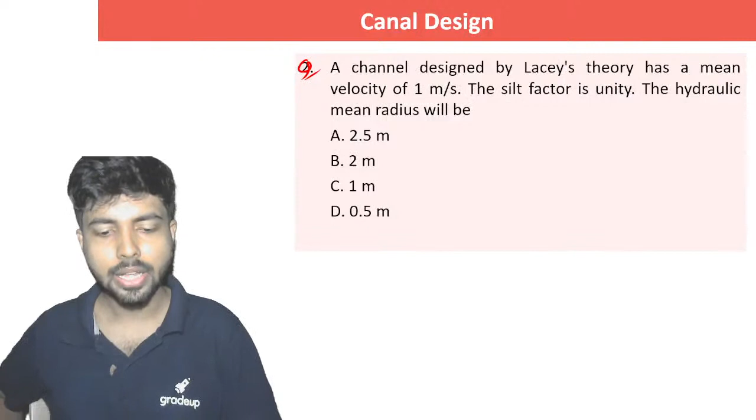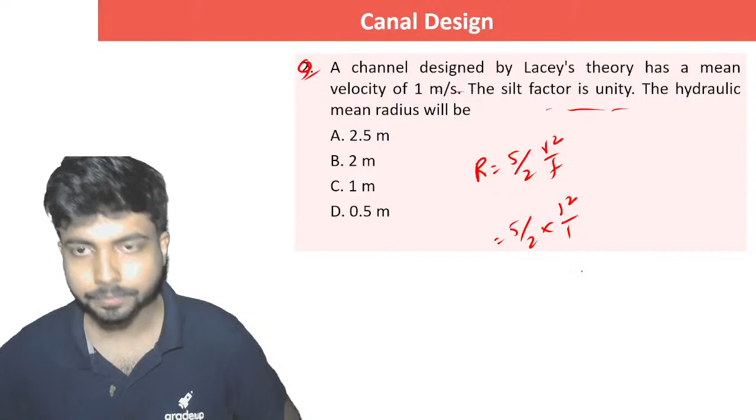So let's see who's going to give the correct answer. Very easy question. We know R is equal to 5 by 2, V square by F, right? We have talked about this particular thing before, this was a check for it. So it's 5 by 2. Starting off with very easy questions. Velocity is 1 meter per second and silt factor is also unity, so it's 2.5 meters, right? So you can understand it.

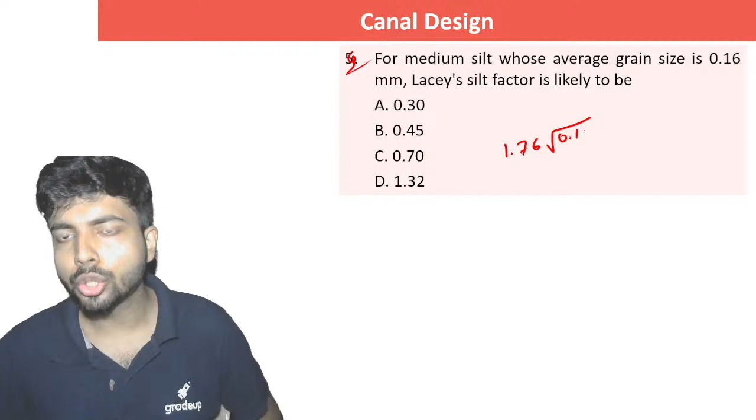Next question is up on your screen. For medium silt whose average grain size is 0.16 mm, Lacey silt factor... Some 1 mark questions first, after that we'll go towards the 2 mark questions, MSQ and NAT. Okay, very easy, ultra easy question. It's 1.76 root over DMM. So it is simply 1.76 into root over 0.16.

So tell me, what is the possible answer? Only one possible answer is there, that is 0.7, right? Next question. The Lacey silt factor for a particular alluvium is 2.0. The alluvium would comprise of what?

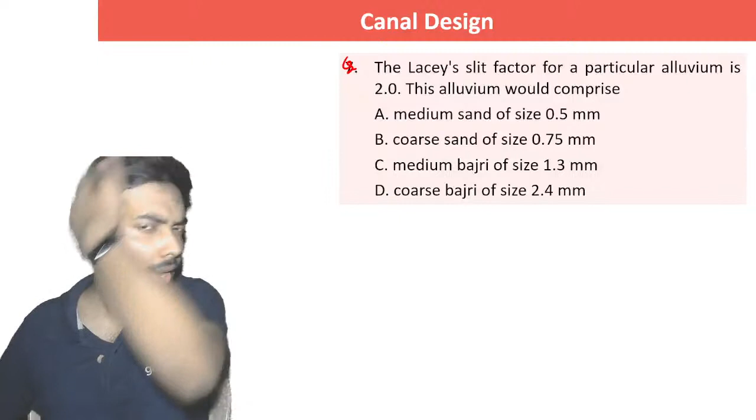The Lacey silt factor for a particular alluvium is 2.0. The alluvium would comprise what? Options: medium sand of size 0.5 mm, coarse sand of size 0.75 mm, medium bajri of size 1.3 mm, coarse bajri of size 2.4 mm.

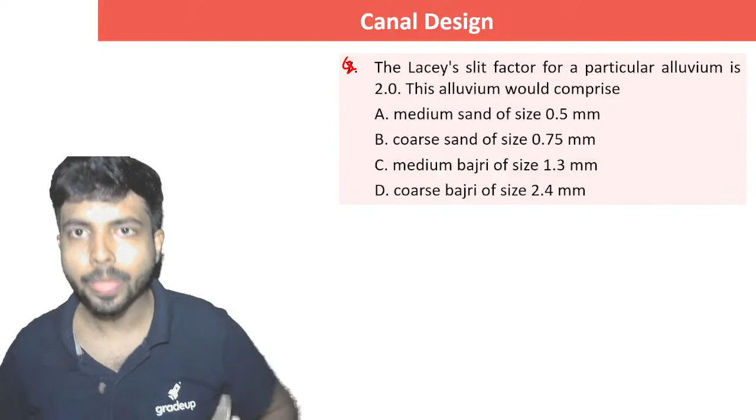Quickly. So again, Lacey silt factor. Many short questions related to this have chances of coming. Are you understanding it? So DMM is equal to 2 by 1.76 square, which comes to 1.3 mm.

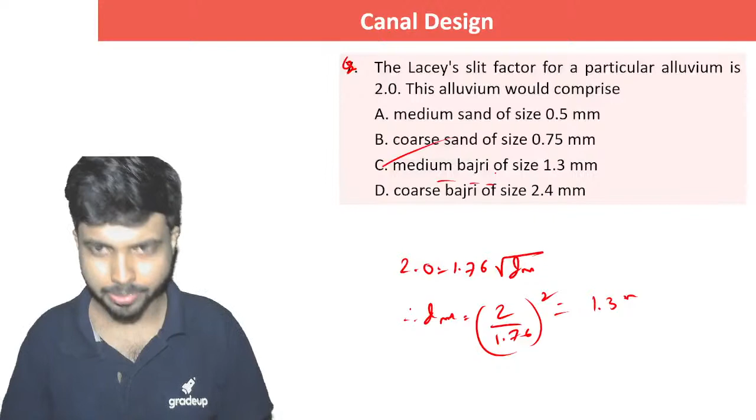Next question is up on your screen. It is actually an MSQ question.

It is an MSQ question, right? I was discussing this particular factor while discussing Lacey's theory, if you please recall. This is an MSQ question, so please be careful. First of all, they are saying silt factor is the average size of silt particles - which one is correctly matched? That is basically what the question is all about. Let's see who is going to give me the correct answer.

Silt factor does not mean average size of the silt particles, right? Silt factor is 1.76 into root over dmm, so it is not average size of the silt particle. What is silt load? Silt load is volume of suspended sediments flowing with water in unit time. Absolutely not. Silt load is the weight of the suspended solid, so this is absolutely wrong.

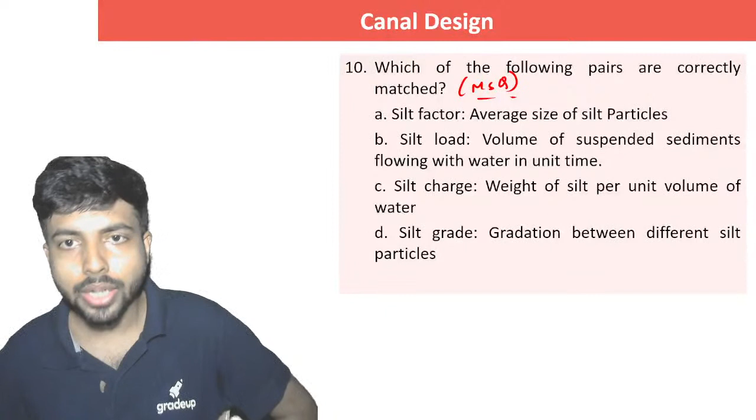Silt load actually means the concentration - how much volume of suspended sediments flowing with water is a concentration type of thing. So the correct option is, we don't call that term silt load. We call it silt charge and silt grade. Silt load is the total amount of silt, that is the silt load. Silt charge is the weight of silt per unit volume of water. And silt grade is the gradation between different silt particles. These two are wrong, so the correct option is C and D.

Understanding? Silt factor is not average size of the silt particle. Silt factor is this one, and silt load is also not volume of suspended sediments at all. It is the weight of suspended sediments with water in unit time. And silt charge is weight per unit volume, and silt grade is gradation.

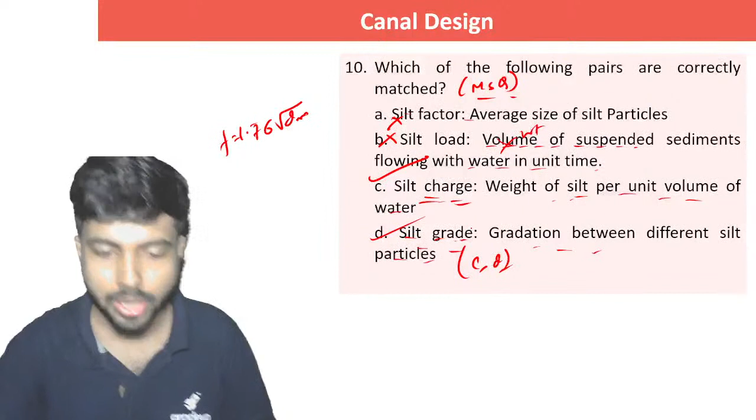Next question. What is the regime scour depth for a channel in soil with silt factor of unity and carrying a given discharge? We didn't discuss that in the morning, so let's discuss it right now. Regime scour depth is a particular formula. Its value is 1.35 q square by f to the power 1 by 3. I think everybody knows this is known as regime scour depth. Just you have to know this particular thing.

The significance is that when we'll be talking about Khosla's theory and other people's work, there you will be able to find the significance of it - the piping, to prevent the piping, and how long it is actually able to scour. So it comes in handy in a lot of things.

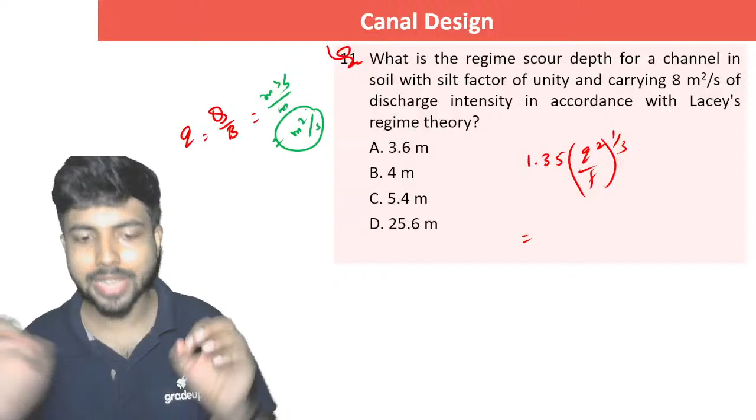1.35 into q square by f to the power 1 by 3. What is the small q? That is the main thing. Small q is actually the discharge per unit length, right? So it's q by b. Q is going to be something like 8 meter cube per second, suppose, and b is in meters. So you understand, it's going to be meter square per second as the unit - and that's why what is given is discharge per unit length only.

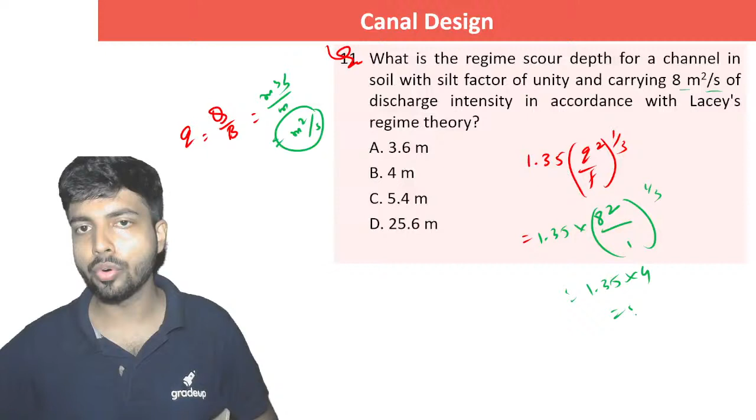Silt factor is unity. So do you understand what is the answer? 1.35 into 64, the cube root means 5.4 meter. So the correct option is C.

Next question is up on your screen. They are saying the channel section can be designed on the basis of Lacey's theory. The steps are mentioned as follows - so which are the first steps? In the morning I told you about the steps, what we calculate first, then what we calculate, etc. So what is going to be the final answer according to you? Please let me know in the live chat section.

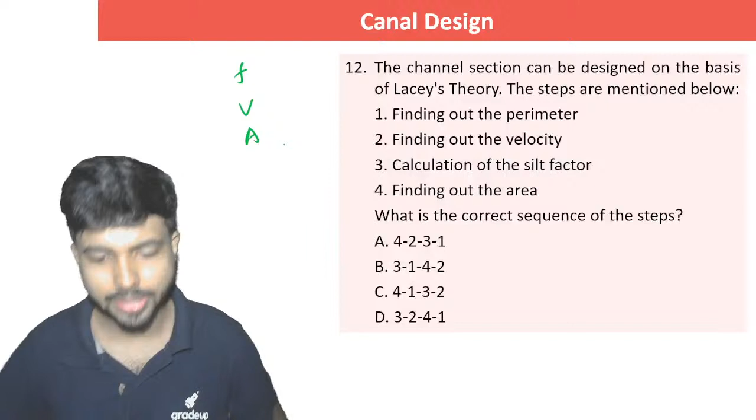It will be easy to solve the problem if you have followed my morning lecture. Absolutely correct, Ankita, on point, excellent. Harish, absolutely correct. So first of all, our job is to find out the f, because after that we calculate v, after that we calculate the area, and so on and so forth. After that we calculate the perimeter and something like that - all these things are there. So firstly the silt factor, because without calculating the silt factor you won't be able to calculate the velocity, which is qf square by 140 to the power 1 by 6. So you need the f value, right?

So for getting that f value you need the silt factor. It's starting from 3. Two options are there, either B or D. After that it's finding out the perimeter or finding out the area. So we know it's going to be finding out the velocity first. So 3, 2, 4, 1, it's option D. I hope everybody has got it right.

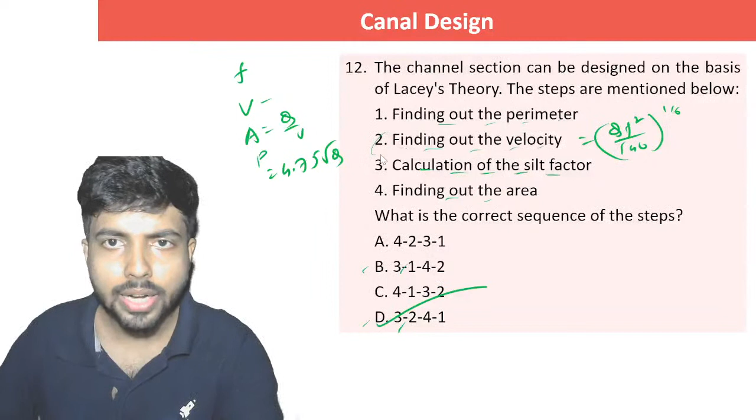So after that we follow A is q by v, and this is 4.75 root over q, and we do that r thing and all, right? So that's all actually. So let's now move over to the next question.

So the next question is up on your screen. Just one second. Next question ka kya ho gaya yaar? Why it's not coming? Okay, just one second please. Oh Bhagwan, kya ho ja raha hai? Yes, the next question is coming actually. The next question has come. Hello.

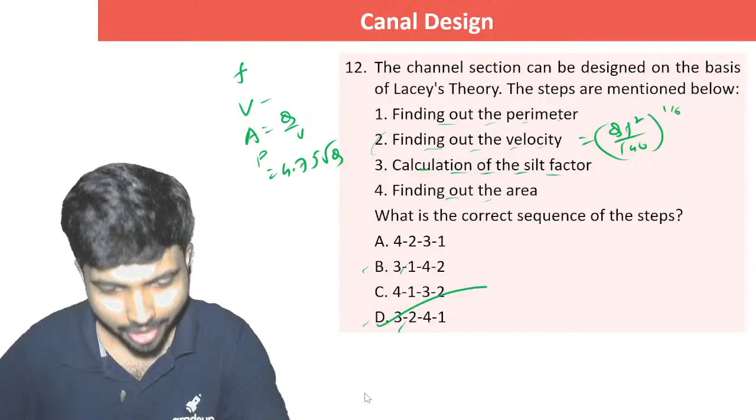Wow, wow, wow. Kya baat hai. Hello, Meghna. Good evening. So that's nice actually, no?

A regime channel will have side slopes of value 0.5 H is to 1 V. Lacey's regime formula is applicable to regime channels with sediment concentration more than...

Hello, Meghna. Hello, Babu. What's that? Okay, right. That's nice. F, V, area, P. That's nice. Hello, Dinesh. Good evening.

So let's see, these are all 1 mark questions so far, whatever we are discussing, except the MSQ ones. This is also an MSQ question, by the way. Except these MSQ questions, all the other problems are 1 mark questions. After that, we will go into the 2 mark questions.

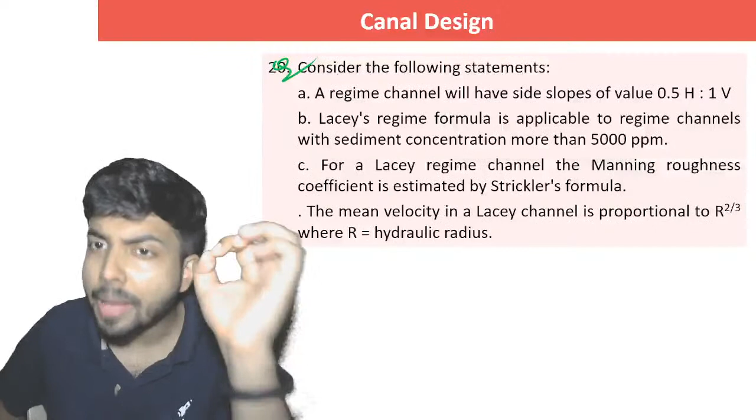A regime channel will have side slopes of value 0.5 H is to 1 V. Absolutely correct. Actually, most of the regime channels have a value of this particular thing, that is 0.5 H is to 1 V.

Lacey's regime formula is applicable to regime channels with sediment concentration less than 5000 ppm. It's not more than 5000 ppm, right? So whatever you can see here, it's less than hone wala hai. This is correct, this is wrong.

For a Lacey regime channel, the Manning's roughness coefficient is estimated by Strickler's formula. Is it correct or wrong? What is Strickler's formula, by the way?

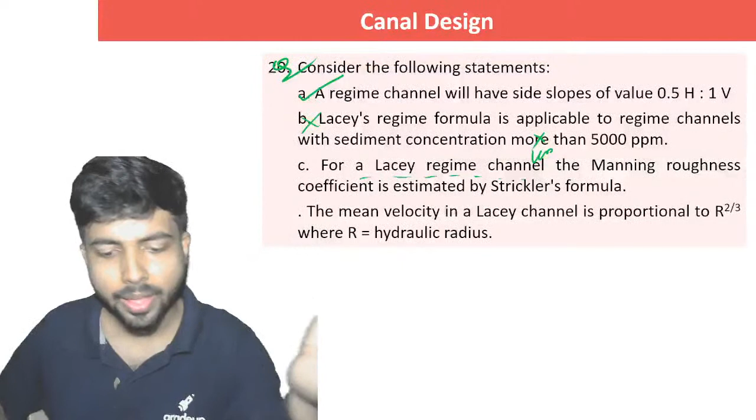Fine, this is wrong, man. This is wrong. See, look how small things you are getting wrong. Lacey's regime channel, where is Manning's coefficient coming from in Lacey's regime channel? In the morning, I told you Lacey's formula is an Atmanirbhar formula, that means it does not depend upon anybody. So it was Kennedy's regime channel. One word was playing with your life, actually, understand?

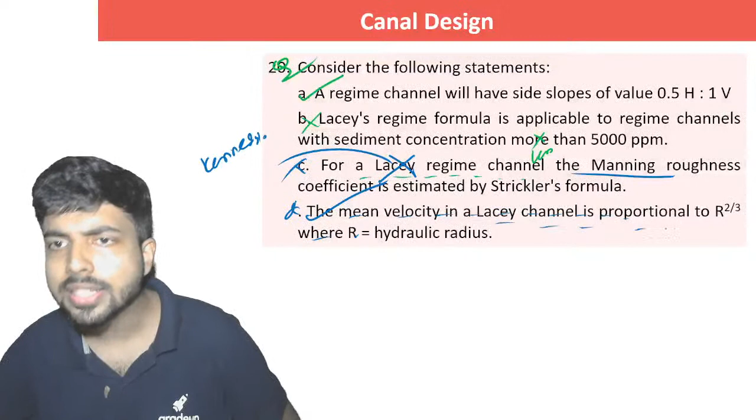So this is D. The mean velocity in a Lacey channel is proportional to r to the power 2 by 3. Now, sir, you will tell me how in Lacey channel it is proportional to r to the power 2 by 3. Sir, there is a particular value that I did not say today. That particular value is equal to V.

10.8. Ek ghante mein to sab kuch nahi bata sakte na. This is also one of the expressions of the mean velocity in a Lacey channel. Apart from that, QF square by 140 to the power 1 by 6, understanding what I'm trying to say? So the mean velocity in a Lacey channel is proportional to r to the power 2 by 3. It's absolutely correct, by the way, right?

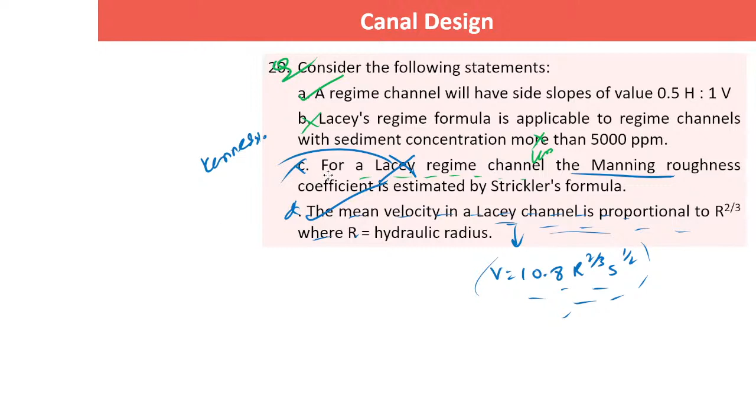Let's see who gives the correct answer to this next question. An unlined canal is to be designed using Kennedy's theory for a discharge of 28 cumecs. The canal side slopes are half and B by D. Yes, by Strickler's formula - thank you for reminding me, Keshav. This is the Strickler's formula: N is equal to 1 by 24 D to the power 1 by 6, right?

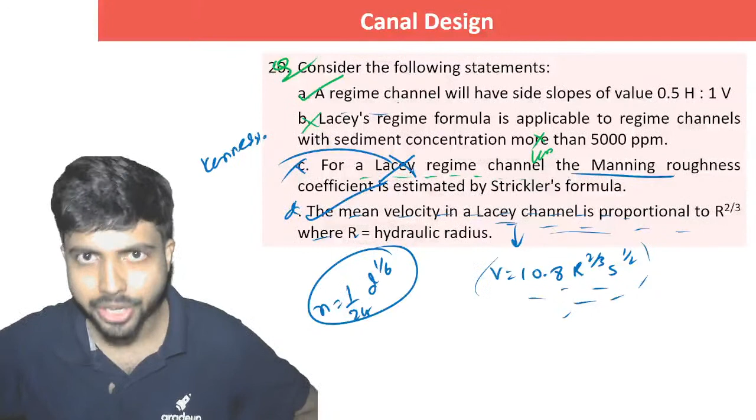So the point is, yes, it's a pretty generalized thing, but normally it's a notion that we follow. If nothing is mentioned in the question, we assume that its slope is 0.5 which is 0.5H to 1V. In this slope, it's a notion actually that siltation and scouring is the least.

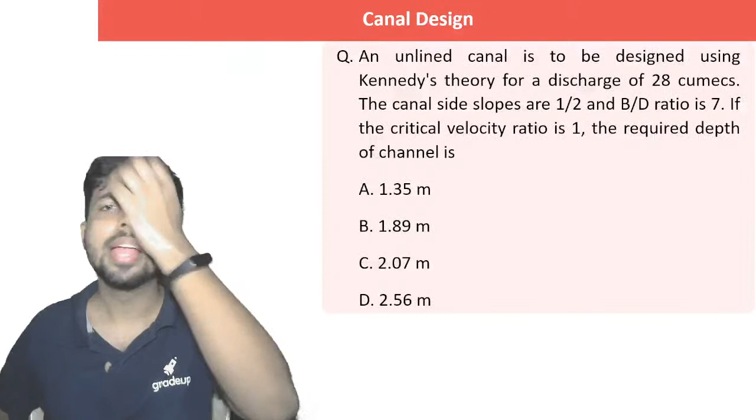So let's see, an unlined canal is to be designed using Kennedy's theory for a discharge of 28 cumecs. The canal side slopes are half, B by D ratio is 7. If the critical velocity ratio is 1, find the required depth of the channel - very easy question. Let's see who gives the correct answer.

In the morning I discussed this type of question - discharge is equal to area into velocity. This is Kennedy's theory. What is the velocity? Velocity is m into critical velocity ratio into 0.546 into d to the power 0.64. Everybody knows it - those who did not attend the morning session, please attend it after coming to this class. Otherwise I'm not going to explain all these things again. V is equal to 0.546 d to the power 0.64.

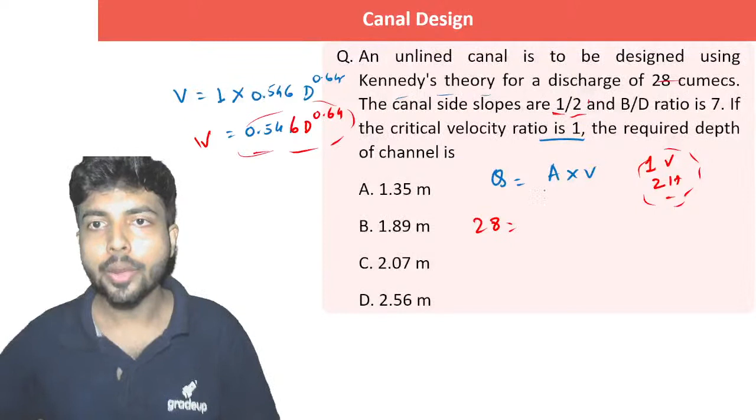So you know that area is given by (B plus ND) into D, right? You people know this. B plus ND into D, into velocity. What is the velocity, sir? That is 0.546. Now you tell me one thing - in place of N, what are you going to write? Please tell me. In place of N, you are going to write 2 - 1 vertical 2 horizontal, right?

So it's 28 is equal to B. Now in the question they have told that B by D is equal to 7, so that translates to B is equal to 7D. So it's 7D plus N, where N is equal to 2, into D, into D, into 0.546 D to the power 0.64. So on the right hand side of the equation you are watching, it's only D - nothing else is there, right? So definitely half means 0.5H is to 1V. Who told you this particular thing? I don't know.

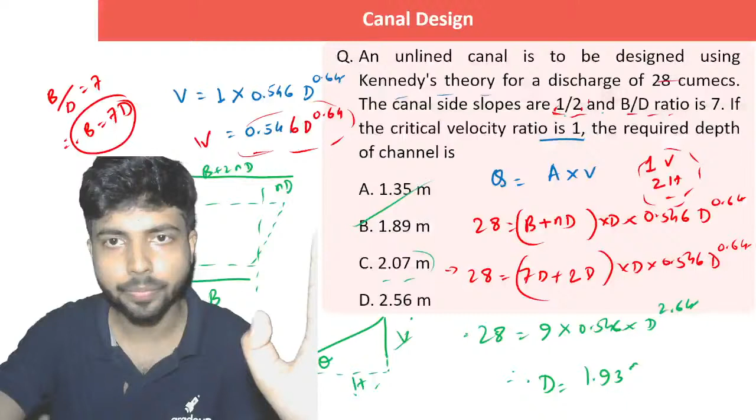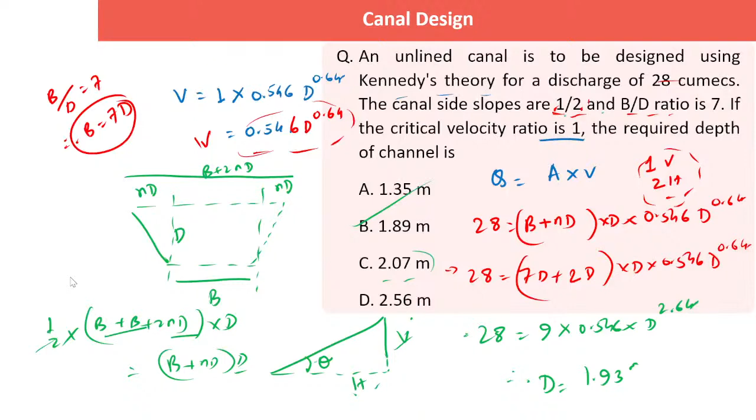Okay, so to find out the width, what is actually required as per you? What do we need, sir? To find out the width, what is required? Sir, width comes mainly where? Where do you get this width term? I would say, where do you get it? Sir, perimeter, sir, perimeter, do you get it? Yes or no, let me know in the live section, sir. Do you get it in the perimeter?

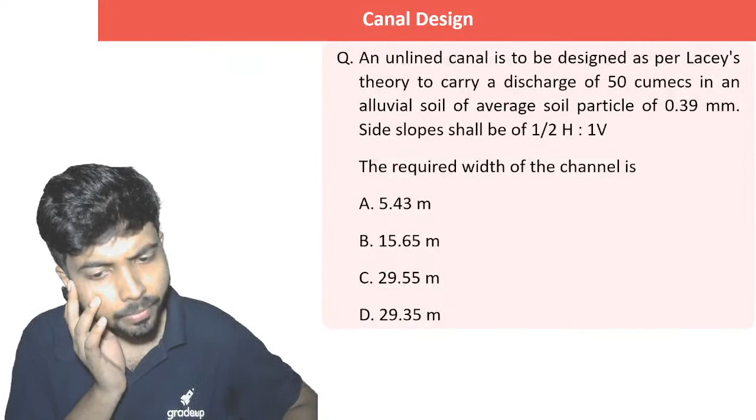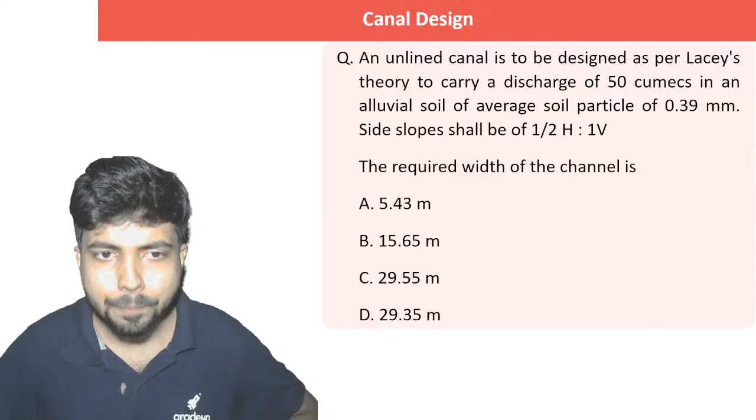Yes or no? First we need to find f, then velocity, then after that area. Okay, area, why doesn't it come in perimeter? It also comes in perimeter, right? That is going to make the calculation much easier, sir. You tell me, what is the perimeter? You can do it through area, but it's just going to be a wastage of time. Okay, you can do it, fine, I don't have any problem.

Okay, so half h is to 1v. Half h is to 1v. Understanding? That means when I am going up by 1, I am going horizontally by half, right? 4.75 root over q, excellent.

That is going to give me the wetted perimeter, right? So tell me, what is the value actually you are getting from here? This is B, right? So everybody knows everything, everybody knows the formula, everybody knows the expressions, but nobody has given me the correct answer yet. That's the irony, I would say.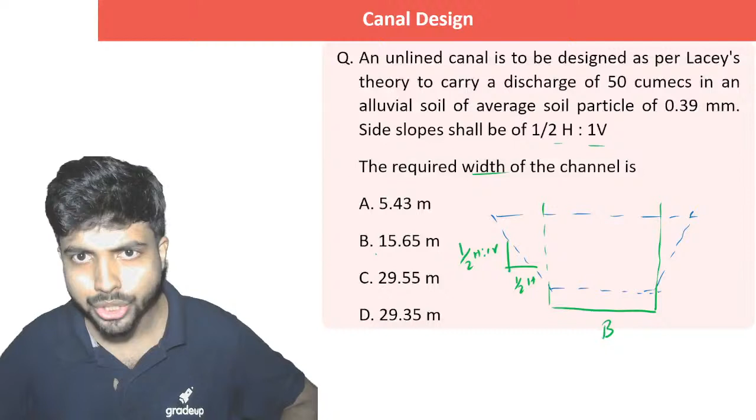Quickly, this is B, okay. What are you talking about? 33.59, is this the question which is asked in the question? Out of this 4, the answer will be 1. Your answers are not matching. 33.75, 33.59, I don't know what it is. I want the final answer. Quickly, give it to me.

Fine, so Manoj has finally answered. It's 33.07, C is the correct answer. Okay fine, let's see it.

Very good, half h is to 1v. So if this is B, suppose you don't know any formula. This is D, so it is 0.5d, it is also 0.5d, so it is d into 0.5d, so it is going to be 1.12d, this is also 1.12d. So the total perimeter you are getting is 1.12d plus b plus 1.12d.

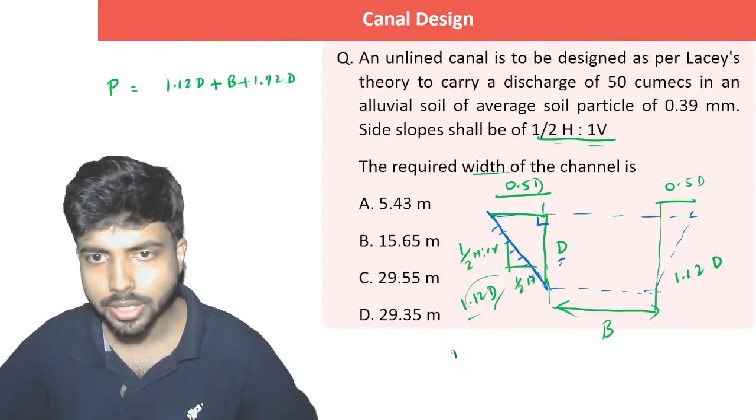Many people I'm sure will ask me where this 1.12d is coming from, because I know there are many people out here who didn't attend the sessions. They directly come and think that they will understand everything. For them: it is d, this is 0.5, so the square root of d square plus 0.5d whole square is 1.12d. From here it is coming.

Understood? This plus this, this plus this plus this, okay. This is the total wetted perimeter: 2.24d plus b. This is from the figure, but from Lacey's theory we also know one more formula for p directly: 4.75 into root over q. What is this particular formula saying?

Q is the discharge, root over 50, equals 2.24 into d plus b. Now sir, where to get the d from and where to get the b from? Where will we get the d, where will we get the b? Would you please tell me sir, where will you get the d, where will you get the b?

How are you saying it's C actually? Have you calculated the entire D value? Because you have to calculate the D on that occasion, right? That will be a very big problem. So I'm supposing and giving you a value of D. Say D is suppose 1.9 meters, which is there. Yes, exactly, otherwise you have to calculate it, which we have done in the morning. So you can refer to the morning classes for that, how I have calculated the depth.

So suppose, just to make the problem shorter, this is given, and from here you are calculating b: 4.75 into root over 50 minus 2.24 into 1.9. So it is given as 29.33 meters. So the correct option is option D, not option C.

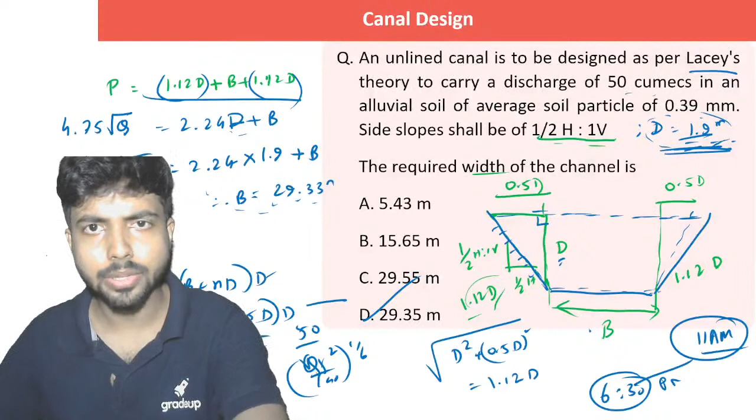So we will be just moving on to the next question. Just in 1 second, 1 second please.

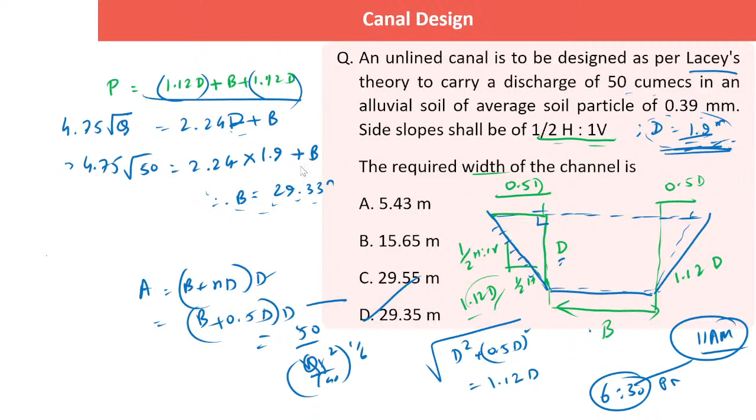So everybody, those who did not understand how 1.9 is coming and so on, I will definitely recommend all of you to go and watch the 11 am class last problem. The last problem is done exactly like this. Next problem is up on your screen.

They are saying an unlined canal is designed for a discharge of 12 meter cube per second. If the silt factor is 1 and the width of canal is 10 meter, the scour depth as per Lacey's formula - just a little while ago I described what is Lacey's scour depth formula. It's 1.35 Q square by F to the power 1 by 3.

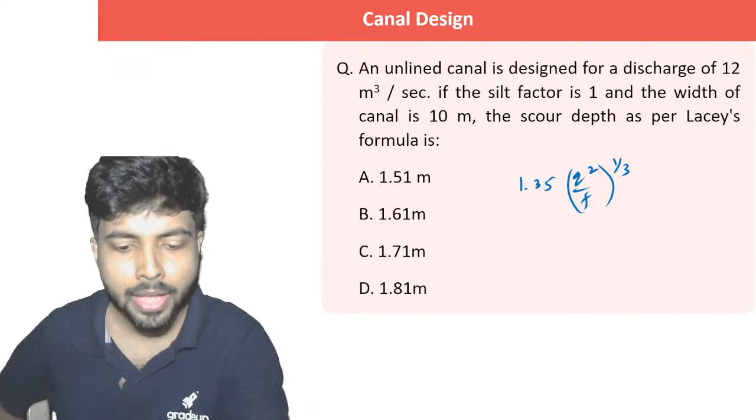Harish, please watch the last problem, right? And the other people also.

Hello Varsha, yes, so Varsha please answer this question. What is the scour depth?

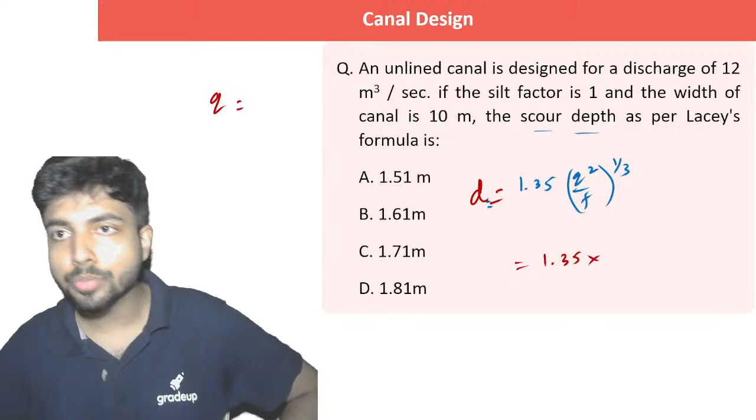What is small q? Small q is not 12 meter cube per second, it is the discharge per unit width. So it is 1.2 meter cube per second per meter, right? So it is 1.2 square by F, silt factor is given as 1, to the power 1 by 3.

So from here I am going to get 1.35 into 1.2 to the power 2 by 3. So it's coming 1.52 meters. So the nearest answer I would say is option A, the nearest answer I would say is option A.

But please, once again I'm telling you, just see that gate calculator video, and do it accordingly, do as per that method. Understanding, that is the main thing I would like to say to all of you people, right?

So one more problem we will just do, that will be based on your Lacey's theory, it will definitely be based on Lacey's theory. But should I give a problem on this particular thing, what do they call it, quadratic equation that we had done? Based on that also we can do some problem, right?

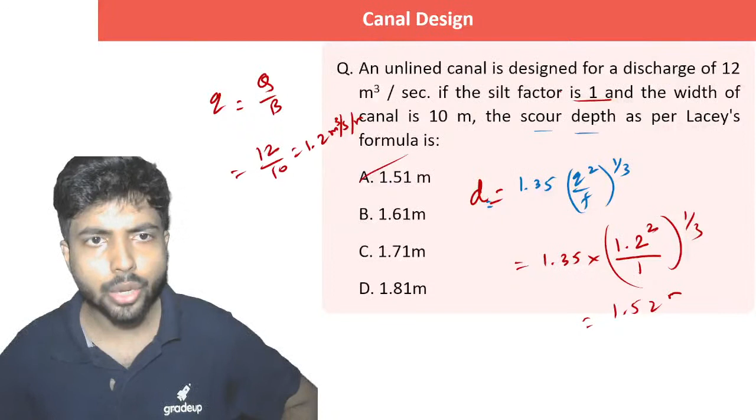The quadratic equation thing that we had done - have you watched that particular thing, how to solve a quadratic equation using what I told you, using the gate calculator? Have you seen that? Have you seen that? Anybody, yes or no? If yes, please give a thumbs up. If you haven't seen, then please tell me.

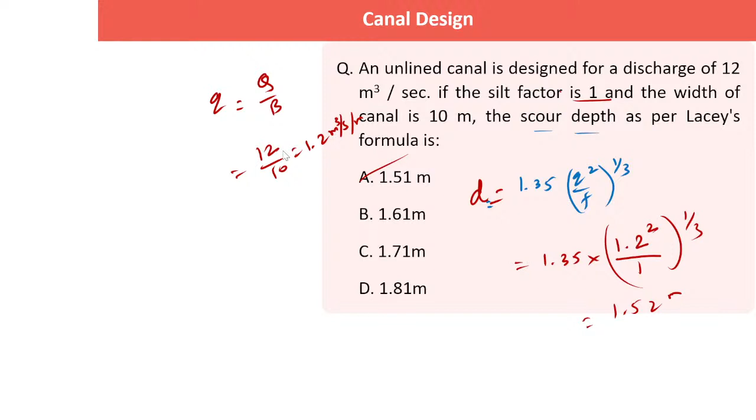Nice question for you people. Let's see who is going to give the right answer. Very easy question, but at the same time a little bit tricky, I would say. Not too tricky, it's pretty simple. But you have to know the formulas for Lacey's theory. A little bit of calculation is definitely involved. So I'm ready to see who gives the perfect answer.

Anybody in the live chat section? Slope is given, average silt size is given, area of cross section is required. Whenever area of cross section comes to mind, think in which step I have done area of cross section. Sir, for area of cross section I require discharge and velocity. I have neither discharge nor velocity, so I will have to calculate both.

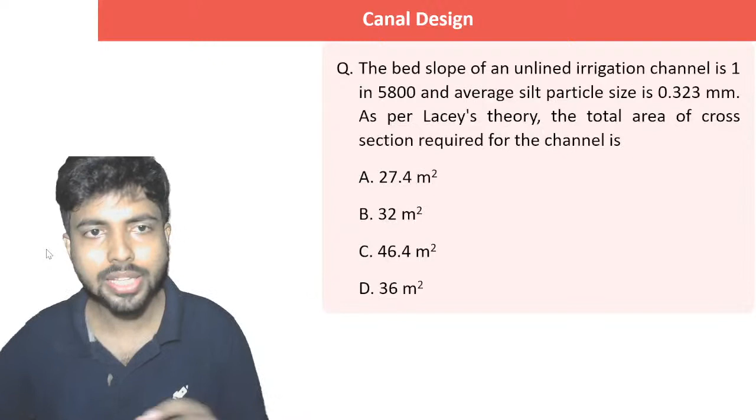For calculating the discharge, is the slope formula sufficient? Think about it. And for calculating velocity, once you know discharge and once you know f, you will be able to calculate the V value. These two things are actually required, nothing else is needed for this question, right?

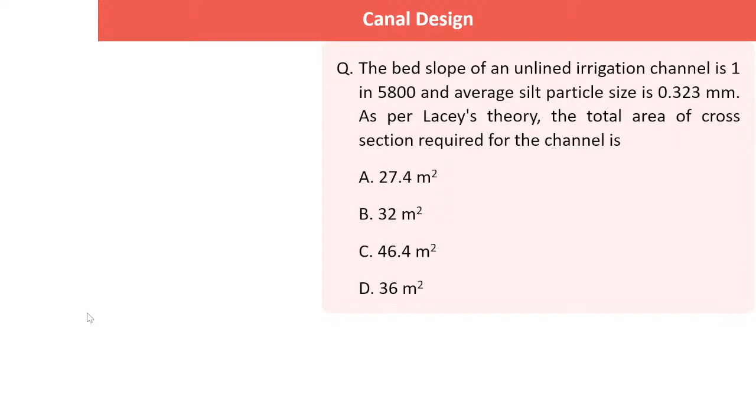So please let's see who is going to give the correct answer to me in this regard.

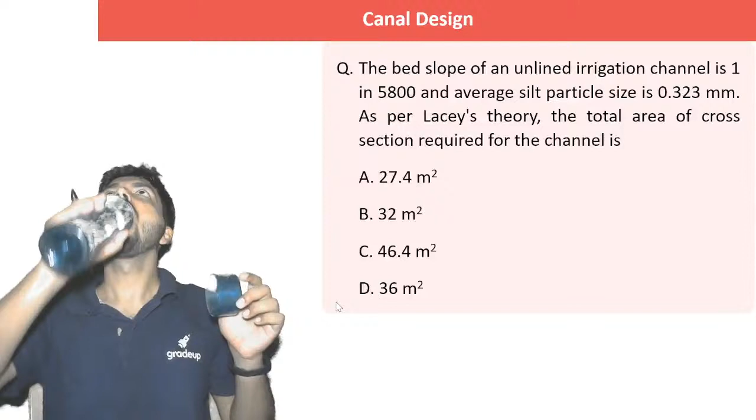Sir, slope is 1 in 5800, so what are you wanting? For A you require Q and V. Sir, what was the formula for slope? That was f to the power 5 by 3, divided by 3340, into q to the power 1 by 6. Do you remember? Sir, do you know f? Yes, not directly, but indirectly, yes I know.

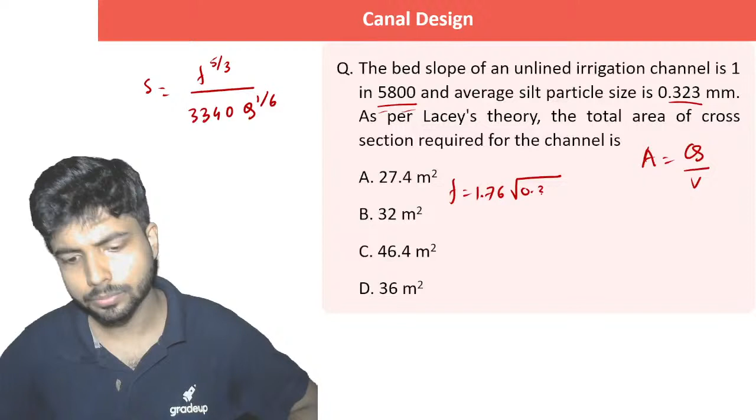So what is the answer coming? It is exactly 1. Very good. So 1 to the power 5 by 3, divided by 3340, into q to the power 1 by 6. So here, sir, you know everything except q.

So can you calculate q? Yes sir, we can calculate q. And if you know q and if you know f, you can also calculate the velocity using q*f squared by 140 to the power 1 by 6. So only two things are required. From here you will get q, you have already got f, so you will be calculating v.

That's it, these are the two things you needed. Understood all the concepts? Please let me know in the live chat section, everybody. Clear, yes or no? First tell me whether you have understood what to be done. After that we will go into the problems in detail. Tell me, yes or no, clear, got the concept everybody?

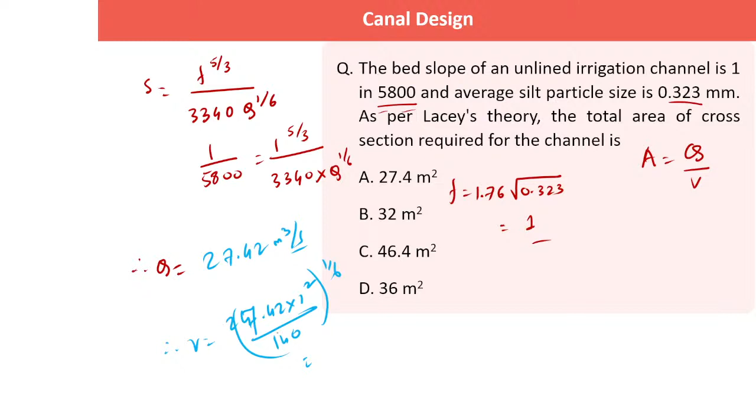27.42 meter cube per second. And if you already have that, V equals q*f squared by 140 to the power 1 by 6. So what is the answer? You are getting 1 by 6, so you are getting 0.762 meter per second. That's the two things you needed.

27.42, 0.762. Now whatever be the answer, you will calculate and let me know in the live chat section. It is coming to 35.984, which is close to 36 meter square.

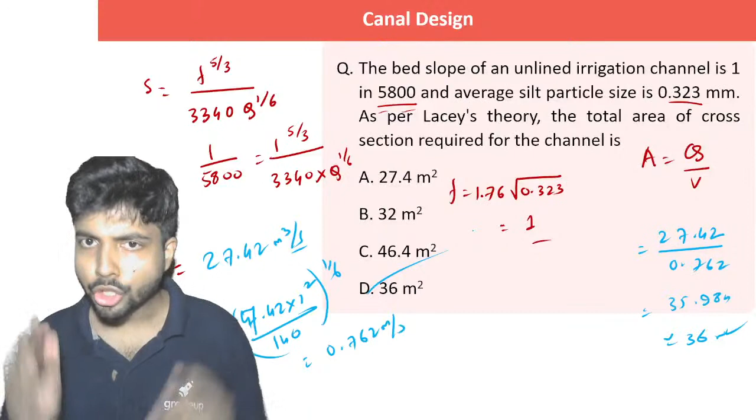Everybody got the concepts? Should we do one more problem of this type? Let's see whether you have really understood or not. Okay, same type of problem it is. Let's see whether you can calculate it, yes or no. Very simple problem, okay, only a little bit of understanding is required.

Let's see who can solve this question. Simple, absolutely the same type of problem, but I want it done in half the time you took for the previous problem. Very easy question, same type of question. Okay, let's see who is going to give the correct answer to me.

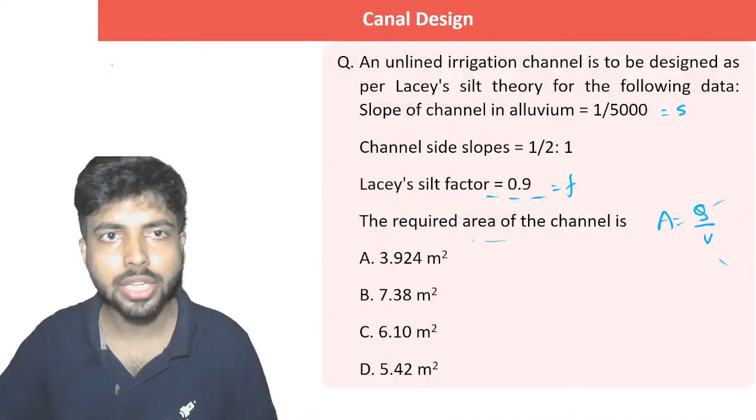Come on, Lacey's silt factor is given, slope is given, and again area is required. So area, you know, is discharge by velocity. Again you require the discharge, you have the velocity. So for calculating the discharge, what are you going to calculate?

F, you already have here, 3340 q to the power 1 by 6. Let's see who is going to give the correct answer to me. Final answer please, which is the correct one - A, B, C, or D, just write to me what that is. Okay, yes, Prathamesh is saying B, F.

3340 q to the power 1 by 6. So if I'm talking about q, I am getting 0.9 to the power 5 by 3 into 5000 divided by 3340 to the power 6. So I am getting 3.924. This is the discharge I am getting, cumec.

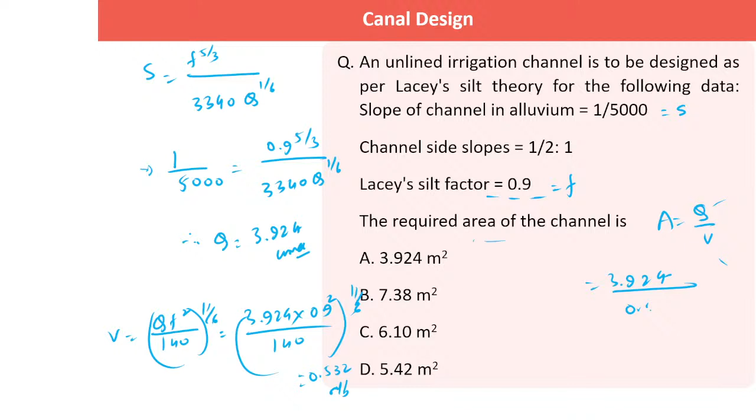What is the velocity? Velocity is qf square by 140 to the power 1 by 6. Q is equal to 3.924 into 0.9 square divided by 140 to the power 1 by 6. So let's see, 3.924 into 0.81 divided by 140 to the power 1 by 6. The correct answer is 0.532 meter per second. So it's 3.924 divided by 0.532 - this is meter cube per second, this is meter per second. 3.924 by 0.532, the correct answer is 7.376, coming to 7.38 meters square.

So the correct option is option B.

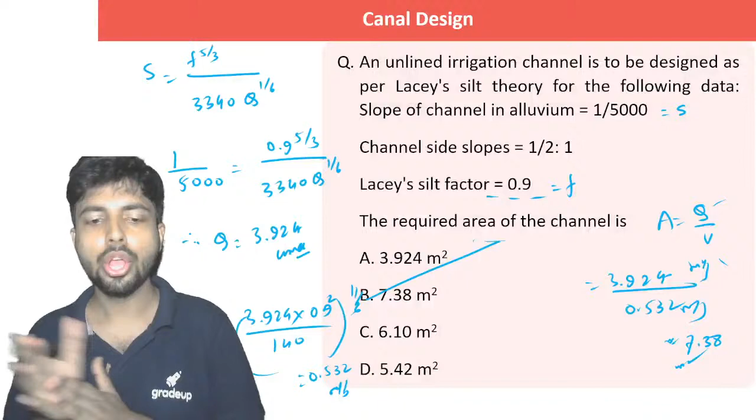Okay, moving on to the next question, which is up on your screen. They are saying an irrigation channel is designed with a bed slope of 1 in 6410 and side slopes of...

Thank you everybody, okay, good. Please tell me what is the correct answer here. An irrigation channel is designed with a bed slope of 1 in 6410 and bed side slopes as given. The silt factor is 1, depth of flow is 2 meters. What is the width of the channel? Very easy question, let's see who is going to give the correct answer.

Yes, Mayuri, tell me what is the correct answer going to be in this occasion. Irrigation channel bed slope is given to you, side slope is also given to you, silt factor is also given to you. They have also given the depth of the flow. They are asking you the width of the flow. So what to be done? What is coming on to your mind?

This problem can be solved in two different ways. You can solve using any one of them. Obviously I will choose the easier one. What is that? Suppose if you know the perimeter, the wetted perimeter of this canal, you already know the depth. So can you please calculate what is the width? Tell me, if you know the wetted perimeter of the canal and you know the depth, can you calculate the width?

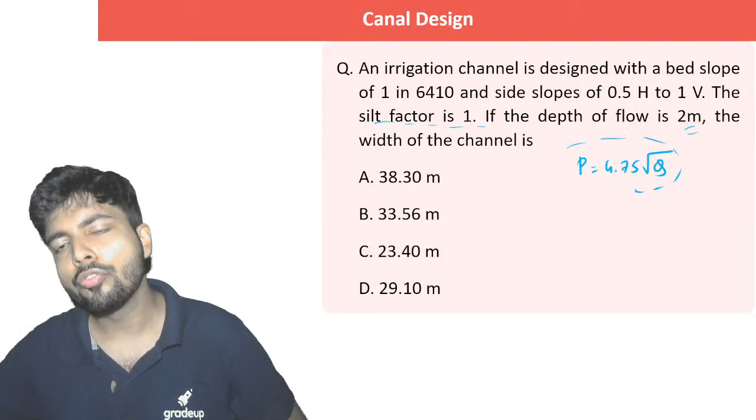Absolutely sir, we can calculate what is the width, no problem. To calculate the wetted perimeter as per Lacey's theory - obviously it's designed as per Lacey's theory because silt factor comes only in Lacey's theory - it is 4.75 root over Q. Understanding everyone, let me know.

So only thing you want is this discharge. If you have the discharge with you, you can solve the question, right? Because for 0.5 H is to 1 V, you know what is the wetted perimeter. The wetted perimeter is given by B plus 2D into root over of 1 plus N square. So actually, since your N is 0.5, it's 2D into 1 plus 0.25, which is B plus 2.24D. This is the wetted perimeter. So just equate this, but you require discharge.

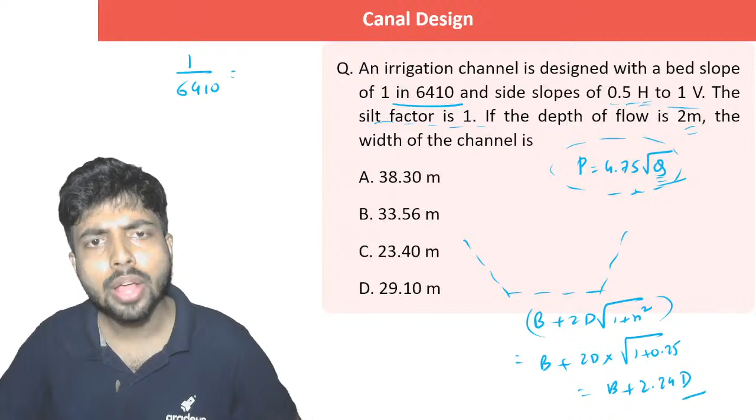To calculate the discharge, sir, again slope is given to you, and just a little while ago I told you how to calculate discharge from slope. So it's F to the power 5 by 3, this particular thing. F is given as 1, very good. So Q is going to be 6410 divided by 3340 to the power 6.

So tell me what answer you are getting. That is, 6410 into 1 by 3340 to the power 6. That means I am getting 49.96 - 49.965, if I am not wrong.

Okay, this is in meter cube per second, right? So what is the perimeter? 4.75 into root over 49.965. So into 4.75, this is going to give you 33.576 meter. This is the wetted perimeter, but this is not asked in the question.

They have asked the width. So you know the perimeter can also be written like this: B plus 2D into root over of 1 plus N square, right? So B plus 2D, D is 2 meter, into root over of 1 plus N square. N is this, we have already calculated it. So B plus 2.24D.

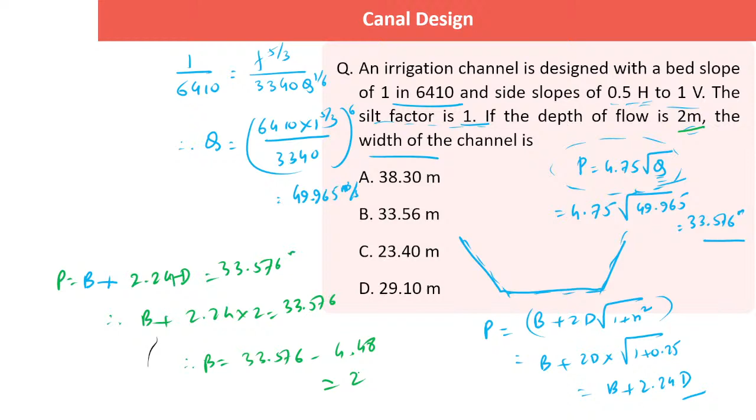That is the wetted perimeter, and that is equal to 33.576. So D is given to you as 2.24 into 2. So from here you will be able to get that B is equal to 33.576 minus 4.48, which is close to 29.10 meter. Everybody understood the concepts?

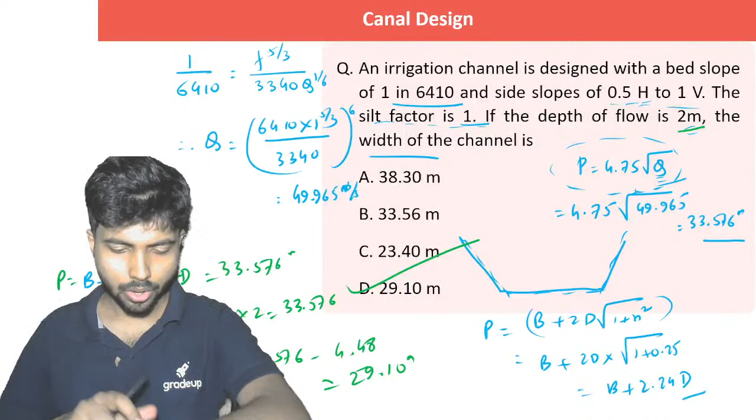Okay, let's go for the next problem. The next problem is up on your screen. Hello, Amar, good evening. Let's see who's going to give the correct answer.

Very simple question. Longitudinal slope is given to you, that means basically the bed slope is given. Discharge is also given to you. What you have to calculate is the average diameter of the particles. Where from will you get it?

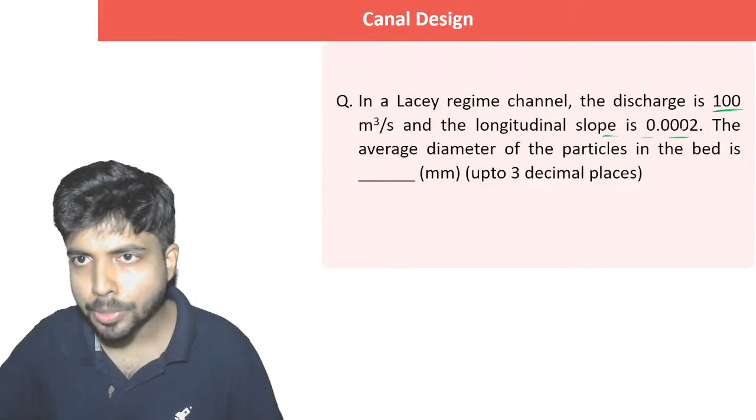We know slope is 0.0002, that means 2 into 10 to the power minus 4. That is equal to f to the power 5 by 3 by 3340 into q to the power 1 by 6. So from here, if I can calculate the value of f, I will also be able to calculate d, because we know f is equal to 1.76 root over d mm. So I know slope, I know q, so I will be able to calculate f, and then d. No confusion, okay let's see.

So here f to the power 5 by 3 is 2 into 10 to the power minus 4, into 3340 into 100 to the power 1 by 6. So you are watching here 2 into 10 to the power minus 4 into 3340 into 100 to the power 1 by 6, to the power 0.6. It is going to be 1.244, if I am not wrong, sir, right? It is coming 1.244.

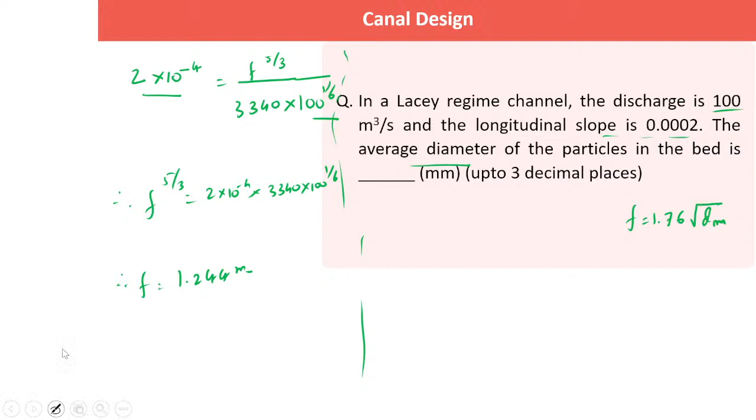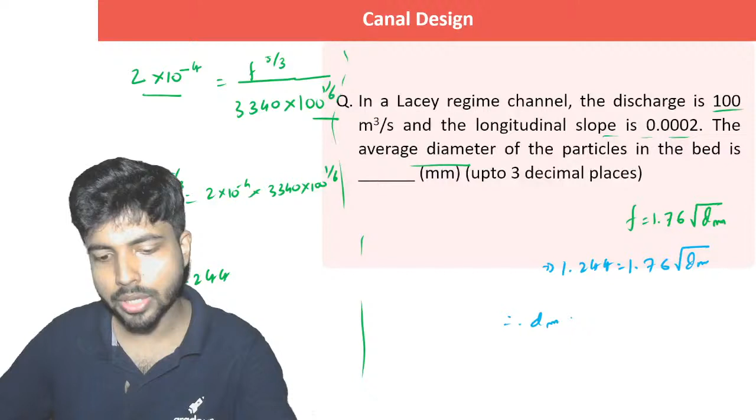Okay, 1.244, sorry, not meter, right? So if I just put it over here, 1.244 equals 1.76 root over d mm. So d mm is coming as 1.244 by 1.76, whole square.

So many people are answering in different fashions, let's see who gives the correct answer. The actual answer is coming 0.4996. Now you are asked to find up till 3 decimal places, so what will you write? If you round it up to 3 decimal places, the answer is 0.500, right? Not 0.499 mm.

Frankly speaking, this was a GATE question. In this question, even a range was not given, just for this reason some people will write 0.499, some will write 0.500. The correct answer is 0.500, you are awarded 2 marks. If you write 0.499, even after solving the question correctly, you will get 0.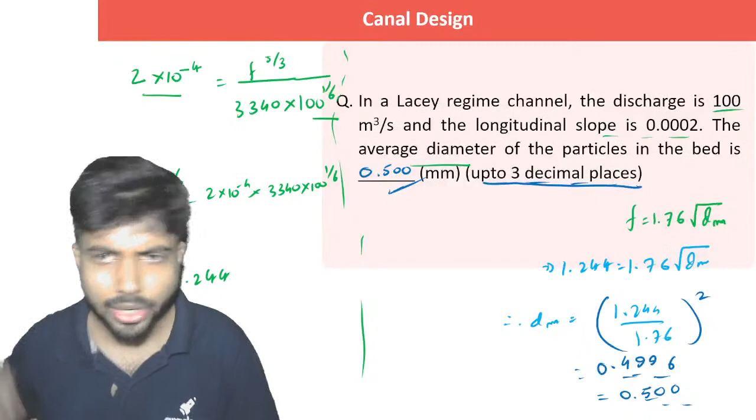Actually, about tomorrow's class schedule - three parallel classes are going on, so just for the schedule I want to give you: that is 10 a.m. highway engineering. Tomorrow's topic is traffic engineering, although it's written signal design, but actually total traffic engineering is going to be discussed tomorrow at 10 a.m., concept plus problem. After that, 11 a.m. I guess the last class for irrigation, I don't remember actually, I guess the last class for irrigation.

Okay, last class for irrigation is tomorrow 11 a.m., and after that at 6:30 p.m. again the problem solving session, the last problem solving session on irrigation. All the links are available in my Telegram group.